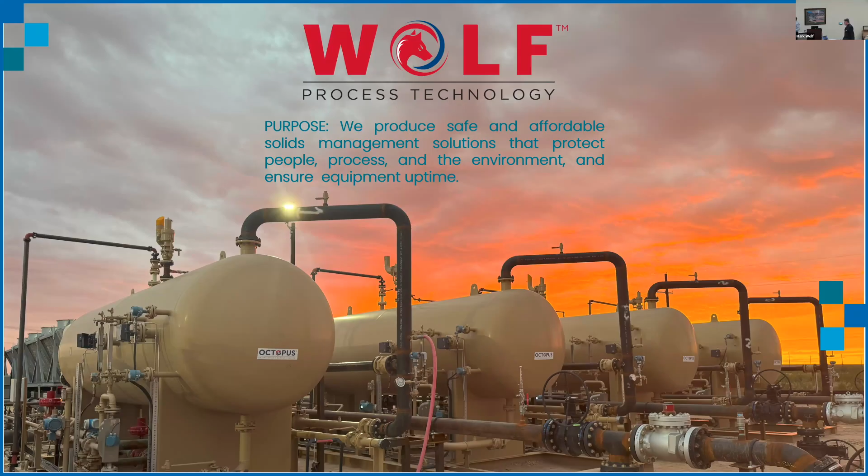Cleaning a tank or a production separator is still one of the most hazardous jobs in the oil and gas industry. I have a little statistic here. This is not oil and gas specific, it's across the US, but from 2011 to 2018, over 1,000 Americans, 1,030 is the exact number, lost their lives in confined space related industrial incidents. That's an average of about 130 people a year who died during that 8-year period, entering confined spaces and doing their normal daily job.

I went to look for a comparison, something a little more sensational. So I thought, okay, tornadoes and hurricanes, those are dangerous, they kill a lot of people. So I looked up that statistic. On average, in an average year in the US, 80 people lose their lives to tornadoes and hurricanes. So for that 8-year period, we killed more people sending them into tanks and separators intentionally than people getting hit by tornadoes and hurricanes across the United States. It's a significant number. It's an important number.

Now, we have a really good track record in the oil and gas industry. It's rare that we have a fatality. It's not so rare that we have near misses or incidents. And I'd like to share one incident, a story I heard recently from a good friend of mine who runs a tank cleaning business.

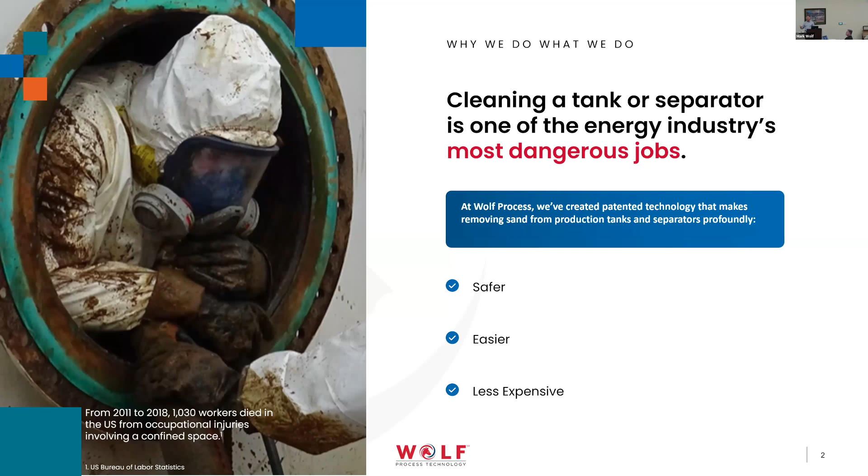Excuse me, I'm a little passionate about that piece of our story. So this is a good success story. This is an operator in West Texas.

We install our technology, and I'll get to the details of it in a minute. I'm sure lots of you want to know technically what is this thing. So we use thermal infrared imaging to detect the level of solids inside of tanks and separators. It works because the solids are an insulator. When they settle into the bottom of the tank, they insulate the shell from the warmth of the process fluids.

So now, if a vessel is offline and has equalized in temperature to the air, it doesn't work, of course. But when a vessel is live and you're flowing fluids through it, usually our well fluids are warmer than the outside environment. The warm fluids will light up the shell that's not covered up with solids. So we can very clearly see the solids, and you can see profiles.

It's really amazing. Simple tool. $400 for a camera that attaches to your iPhone now. That's how cheap it is to go out and get these. So if you know anybody that's dealing with it and they haven't already adopted IR technology for looking at levels of solids in tanks, they're behind the time.

That's simple stuff. But this is the image on the left. So we installed our Octopus in a 10x40 production separator. This is in the Permian Basin, in the Midland Basin area of the Permian Basin for one of the major operators.

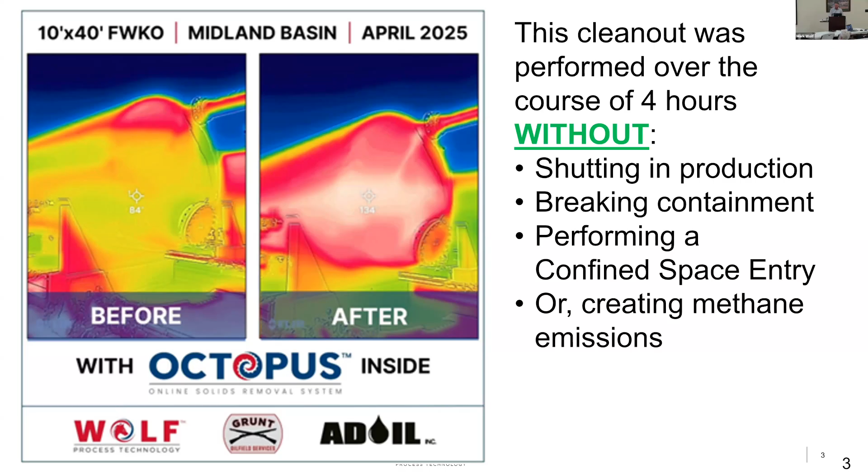So just a little background, and I promised I like to try and give some good content, not just a sales pitch. So I've got a few bits of technical information in here that I'll share with you.

So what we're looking at is a typical production system. They're all a little bit different, I recognize that, but a typical production system where your first step in separation is your primary separator. Sometimes you'll have a test separator in line, but for the most part, you're going into a primary separation vessel. It's usually a pressure vessel, although there are some exceptions in stripper wells. But this is the first place where sand wants to settle out.

Sand is heavy. And again, we're not talking about just sand. Sand is prevalent in the Permian Basin where they're fracking wells, but in other areas, it's other types of solids. So if I use the word sand or solids, I'm using them interchangeably. Please forgive me if I do. But the solids will settle out in the first spot where the momentum slows down, and that's usually the production separator.

It will build up if unchecked, and then it will start to carry over. You may see some decline in separation efficiency. You may see more emulsions, more bad oil coming out. These are all signs that solids are starting to accumulate in your production system.

The next step is it will follow carryover with the water, and generally that happens pretty quickly. So wherever your water goes next, in this diagram I've got it go through the gun barrel tank, which is pretty typical in West Texas. It may go to a free water knockout. If you're in high water production areas, free water knockout may be the first thing in your system. But again, this is just general in nature.

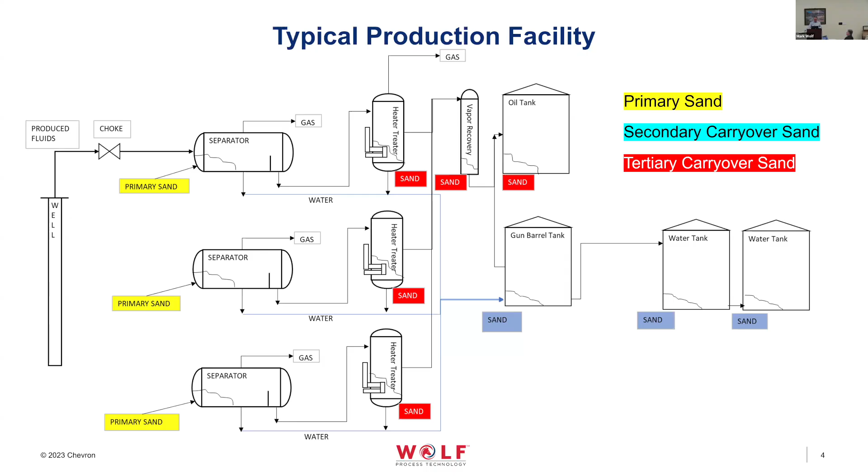Let me see, are there any questions so far? I'm kind of expanding a little bit - that's a tip, because I need a drink of water. So anyway, now would be a good time.

How much of the solids can you control with your technology before they enter the separator?

I hope to answer that question through the course of the next slides. And if I haven't answered it, please ask it again, because I have some good visuals that I think will help answer that. So just a little background on technologies.

I've got two diagrams. The diagram on the left is traditional sand jetting technology. It's been around for many, many decades - I've seen references back into the 70s. There was a good paper presented in the 80s about how to design a sand jetting system. In general, sand jets - I'm going to call them linear sand jets - introduce high pressure water through a small opening, a classic jet, using a pressure washer approach to sweep sand across the vessel floor to a central drain point. That's the theory behind it.

A lot of problems with traditional sand jet systems, which were installed in the North Sea from the original designs, and they failed - they didn't work for a number of reasons. One, the sand jets can very easily become plugged. They have to be fed with a water source, and oftentimes that water source will be coming from a tank that itself has solids accumulation in it, and it recirculates back through and plugs the sand jet.

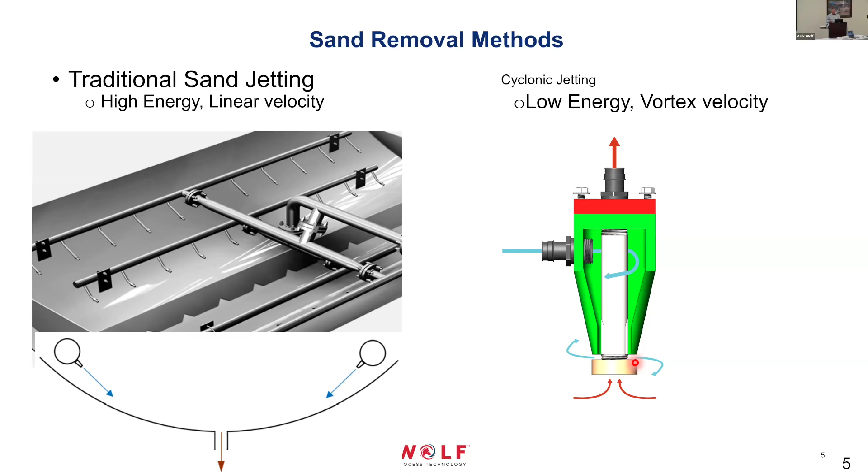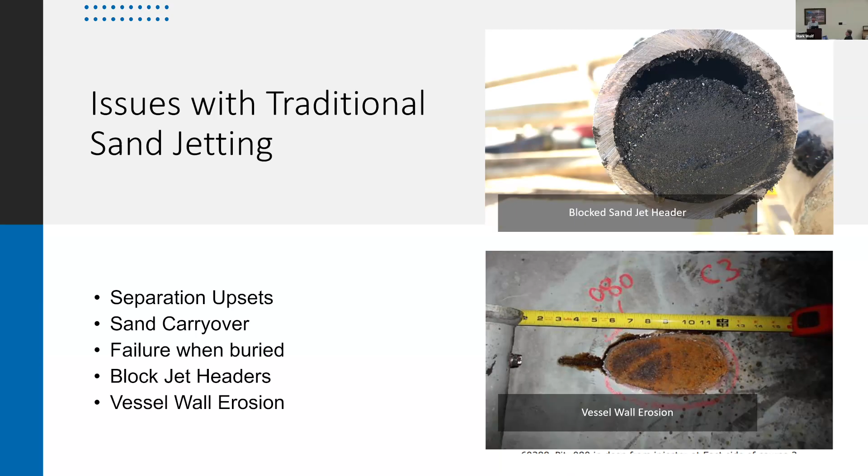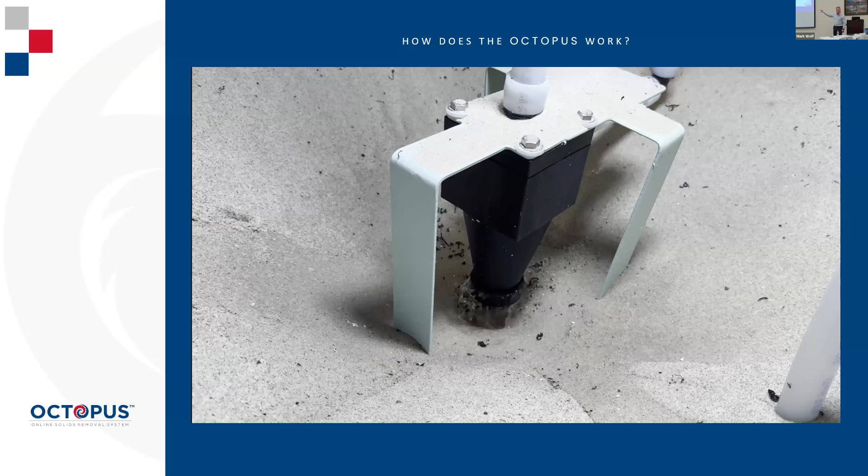What you're seeing is our cyclonic jet, or VFU. It's going to start where most of the sand has been removed, so we can see the swirling action, and then it's going to flip to showing full of sand. But let me just give this a start.

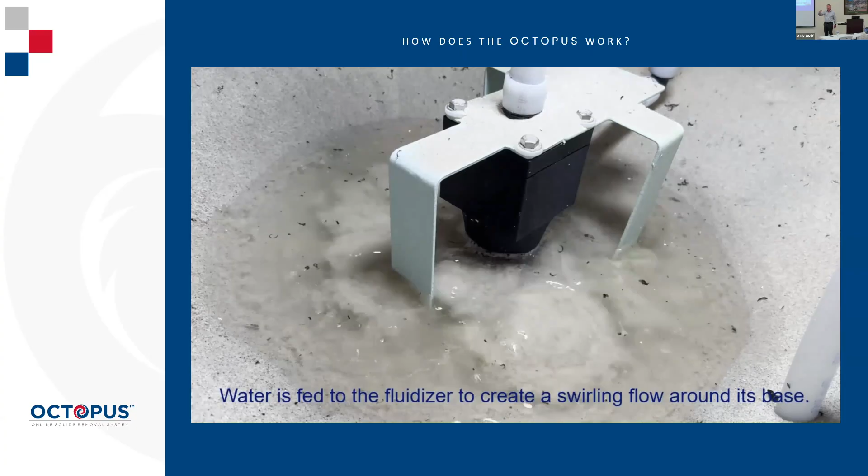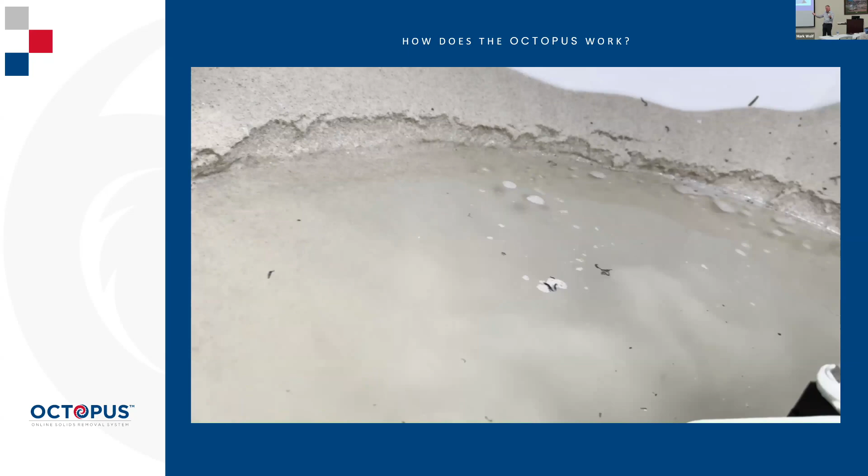So we're introducing the water. It's hitting the foot, and you'll see how it sets up a swirling motion that disrupts the sandbank. It's like undercutting in a mining operation where you're digging sand out from the base, and it sloughs into the area of influence where it can be pulled out by the vortex that's under the discharge tube.

You can see we're generally flowing at about 25% by volume with this sand. I won't get into the technical details of why, but it has a lot to do with particle size and characteristics of the sand itself.

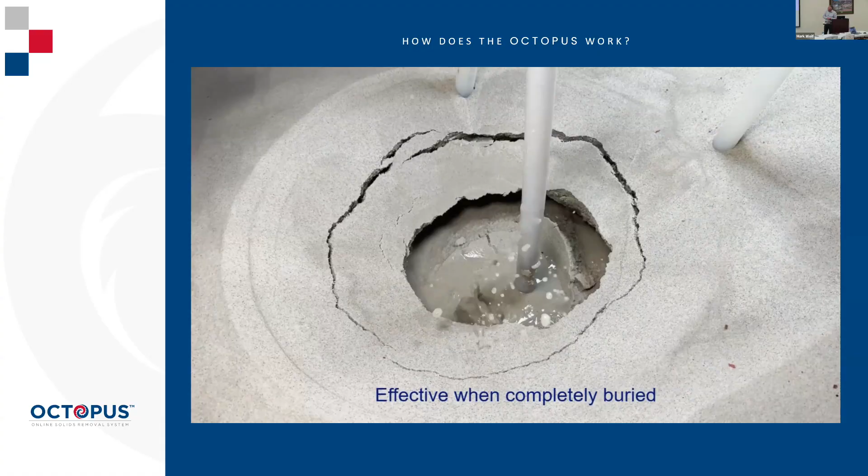This is my favorite scene in the video. That's about 3 feet deep right now. The picture I showed at the beginning was about 8 feet deep, and we were able to dig that out—very effective at removing solids when it's completely buried.

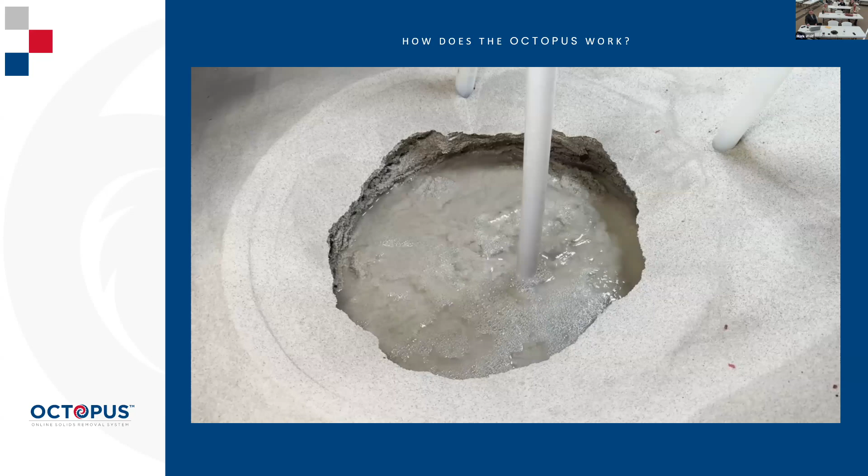If you think about a vortex, a tornado is a great example. The winds out away from the vortex are slow, and as you get closer they get faster and faster, because you've got the same mass of air trying to move in a much smaller space, so it has to move much faster. It gets acceleration—it's like swinging a rope with a coin on it. As you pull it in, it moves faster and faster. Just simple acceleration due to shortening the radius.

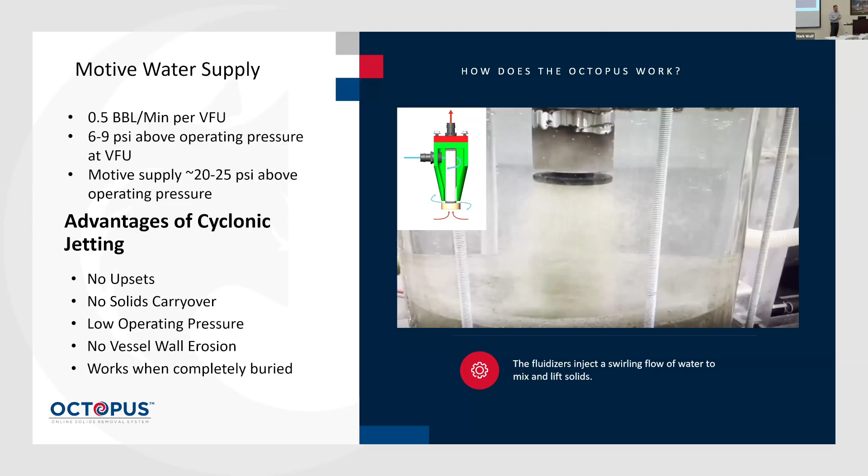And that's how we generate our velocity. That's why we're able to generate enough velocity to lift solids from the bottom without a lot of pressure. It's using the vortex. A little technical bit for those of you who are technically oriented. So, okay, that's the basis of the technology.

But our goal has been to reduce the cost. So I'll talk about how we did that.

So what you see in the upper left of this screen is the way we used to manifold these devices together. It's important to manifold them inside a tank or vessel because each of these jetting units has a 1-inch connection in and a 1-inch connection out, and each one will affect an area between 3 and 6 foot diameter. So we're covering a large area—we need to put a bunch of them together. We have to manifold them.

The way we did this, starting back in the 90s in the North Sea, was we engineered these mirror-imaged piping systems. If you look—I'll use the pointer again because I think it'll be helpful—if you look at this image up in the left, let me just explain why.

When we put multiples of these on a manifold, it's important to achieve what we call hydraulic balancing. The pressure loss from each device to the point of discharge of all the devices needs to be the same. If they're not the same, you'll have differences in pressure loss, meaning one device will pull more and the other will pull less. So we have to hydraulically balance them—that's why these complicated piping manifolds came into play.

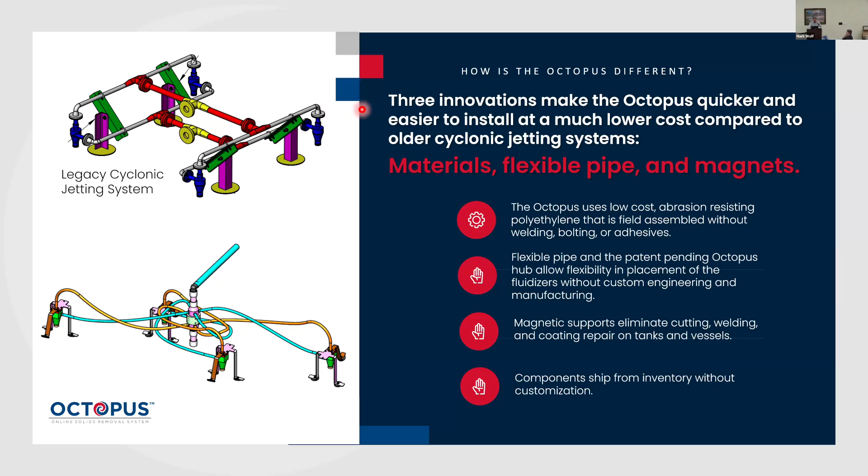This is an important part. Did I get that concept across well? Do y'all understand the advantages of the hub and the flexible pipe? Does that make sense? Question from the audience, Shane? They're behaving quite well. Okay.

Okay, so this video is already running. Before I get a chance to introduce it, I'll rerun it.

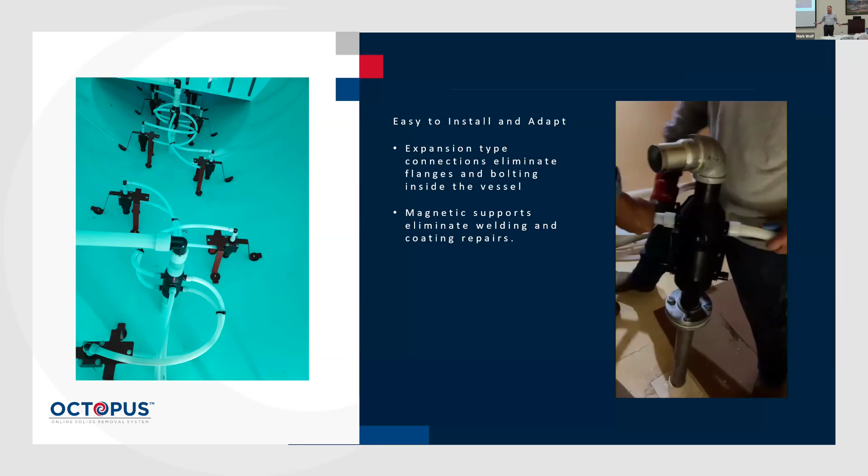So we looked at commercial materials and found PEX. You may have heard of PEX—we're using it everywhere in houses. In Houston a few years ago, there was a hard freeze. For Houston to have a freeze where the temperature stays below freezing for more than a day is rare, but it stayed below freezing for 2 weeks. In Houston, they build all the houses with piping in the attic.

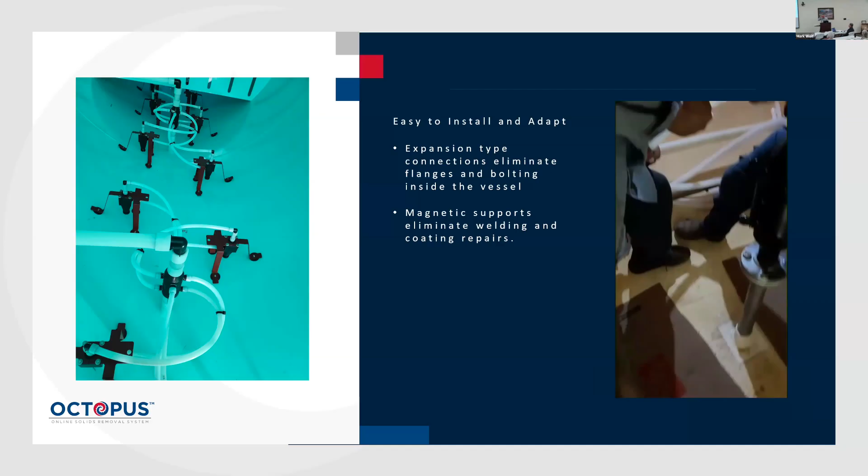There we go, run that. So you can see a joint being made where he's using the tool to expand out the joint and slip it over the barb. So that's how quickly the joint is made, and there's no metal.

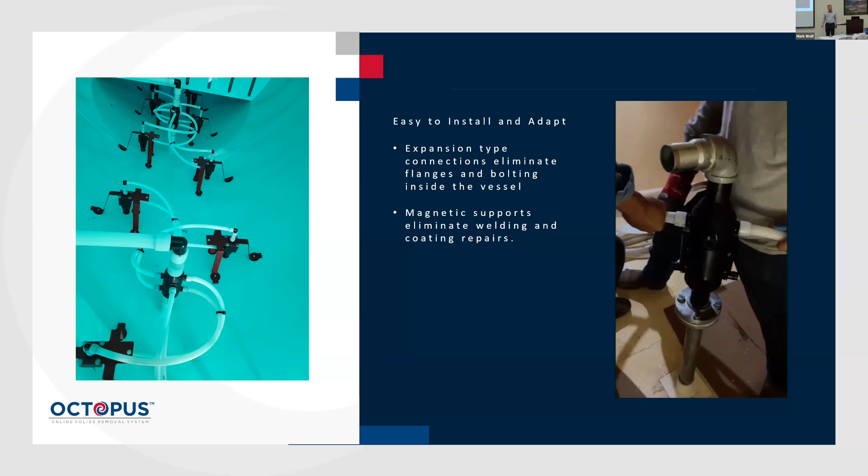We used to put these things together with flange joints inside of vessels. With a flange joint, you've got to use stainless steel bolting, you can't use carbon steel bolting. You put stainless steel against carbon, you set up the potential for dissimilar metals corrosion. It takes longer, all sorts of problems.

So we've taken care of that problem. When you're working inside of a confined space, we still have to go inside of these vessels to install them. We make sure they're cleaned out to what's called a level 2 environment, meaning it has an atmosphere that's safe, so we don't have to go in under air, and we've removed the hydrocarbon. Still, working inside of a confined space is difficult.

The floor is shaped like this, it's not flat, it's easy to slip. So we want to make it as easy and as quick as we can to do the installation. That's one of the innovations we brought to this technology, making installation quicker and easier. And this joint has done it for us.

The image on the left shows a fully installed system. You can see our main piping coming in from the vessel wall and exiting the floor, with our VFUs spaced out. This talks about another innovation we introduced.

We used to have to support all of the stuff inside of the vessel, and generally we would weld on what we call a clip, a little metal piece you can bolt something to. In a retrofit situation, to install a clip, you've got to grind away the coating, go in and make the weld. And if this is a code vessel, now you've got to bring out an AI inspector to re-inspect, re-hydro test. It's a long, arduous process that makes it prohibitive to do retrofits if you've got to weld in supports.

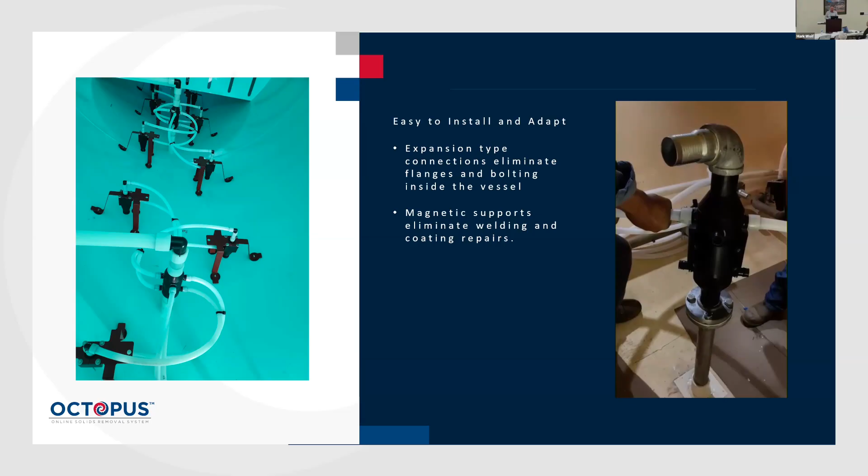Mark, yes, I don't have a sense of scale. How big are the VFUs, generally speaking?

I wish I had one here for a sense of scale. The VFU with the magnet, the VFU itself is about this big. That whole piece standing is about this tall and maybe this big at the base. This is inside of a 10-foot diameter vessel that you're looking at.

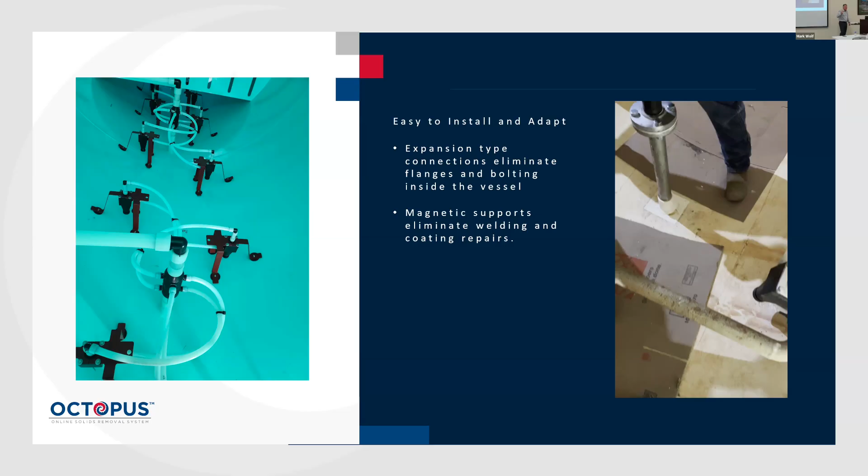Okay, just a little bit on materials. We do have some material options. The base material that we have in inventory is high density polyethylene, HDPE, and of course the PEX. The HDPE is rated to 180 degrees Fahrenheit, which fits most applications that we need.

We're also doing some high temperature work up in Canada in the SAGD area, a great EOR method that the Canadians brought to the world. They have much higher temperatures, so we do everything in stainless steel there. Same style of hub, but we're using convoluted flexible stainless steel in lieu of the PEX. So no PEX in the high temperature stuff.

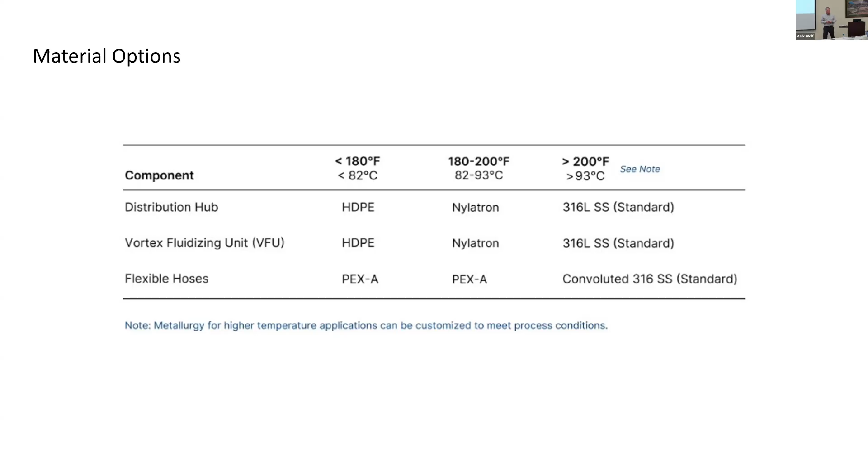There's room for an intermediate material in there, which we're calling Nylatron, but we're very, very close. We will eventually be able to replace the HDPE with the Nylatron and just have one material for the base. But at the moment everything is still HDPE, since it's more readily available and a little lower cost.

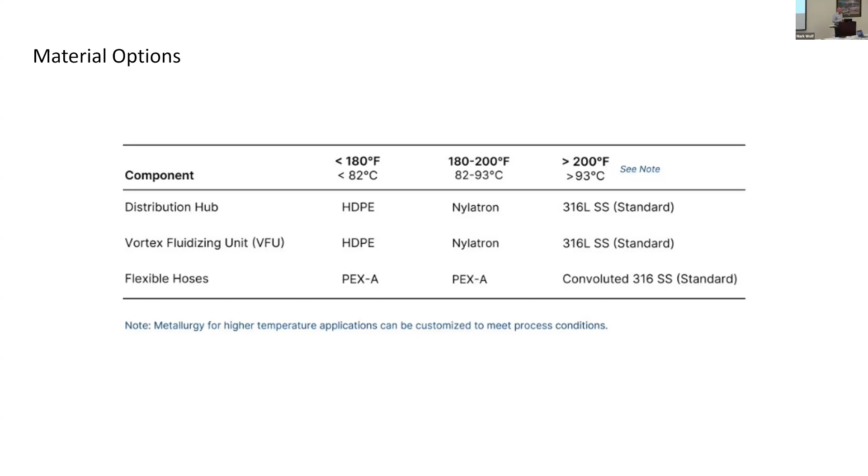We're at the point where we're machining our components. We haven't yet gone to molded components, so it just makes sense for the market that we're in now. But there's still room to reduce costs further, and we're working on that. Any questions before I talk about applications? I think I've covered the technology as well as I could.

Again, that's my trick, so I can get a drink of water.

So, are you using this application? I mean, it's a pretty neat concept. So is it just for onshore, or are you also using it offshore? I mean, you mentioned North Sea and Canada. So what percentage of your products are being used by the high temperature application?

I have a couple of slides that I'll talk about there. We've innovated outside of the vessel, but in general, if you look at the capital cost of what goes inside the vessel versus the CapEx for a typical offshore project where you have to automate all the piping, there are sequences - water goes here, then slowly comes out - and there are valve sequences to deal with. That's either a man sitting there who knows what he's doing, or a computer that's automated. But when we looked at those costs, the cost of the external piping with full automation was 85 to 90% of the total CapEx.

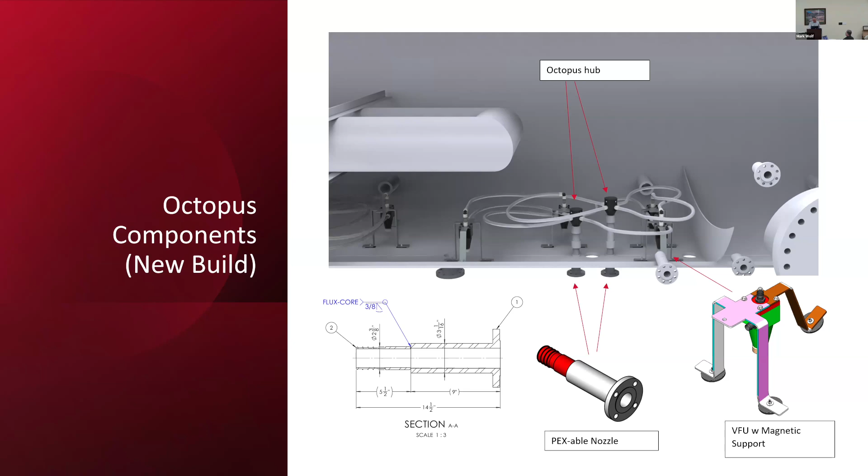When we do a retrofit, we're having to work with nozzles that are already there. We don't want to cut new nozzles onto the vessels - rarely does it make sense, though there are cases where it does. But usually there's a drain nozzle, some kind of spare vent nozzle, or an instrument nozzle that we can use.

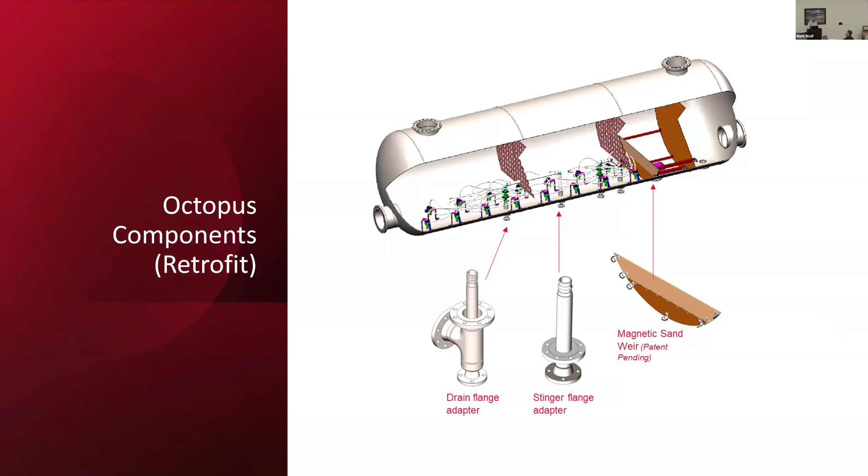So in some cases, we'll add a magnetically supported sand weir or sand dam into the vessel. In the image I showed a minute ago, you can see the sand weir right here in the vessel. This was something that was put in because the vessel was new.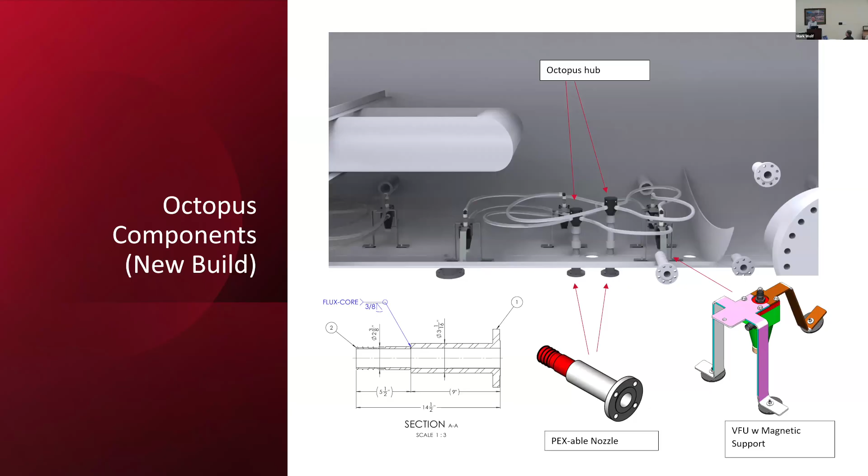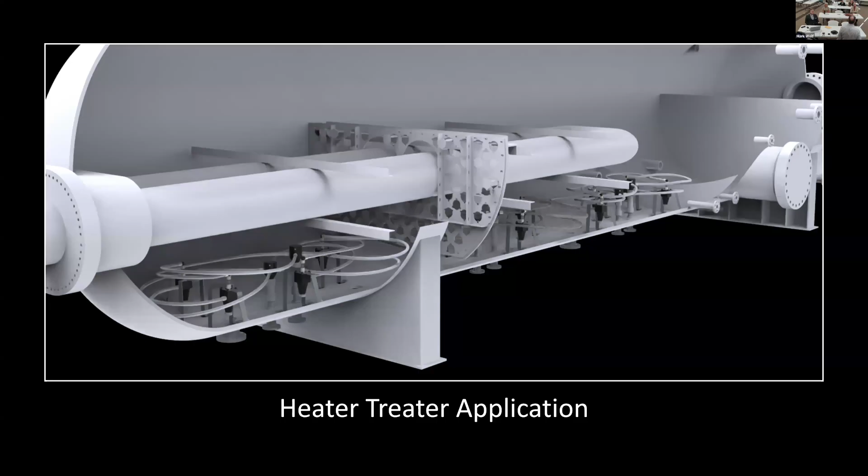This is a heater treater application. So I get the question: your PEX is rated to 180 degrees and you're putting it right up underneath a fire tube, where obviously the flame is at much higher temperatures. But the materials we're using don't see those temperatures. It's kind of like when you're sitting outdoors at a restaurant, it starts to get cold and they turn on the heaters. If you reach up and touch that heater, you burn yourself. It's hot right at the surface, but that heat dissipates.

So you're getting some radiant energy. When we're flooded underwater, the radiant energy dissipation is a lot higher, so the temperature of the fluid bath equalizes really within a few inches of the fire tube. So even though that's the case, what we look at is the planned operating temperature, or max operating temperature, of that heater treater vessel. For those of you who don't know this term heater treater, if you're not spending a lot of time in production, that big pipe is the fire tube I mentioned earlier.

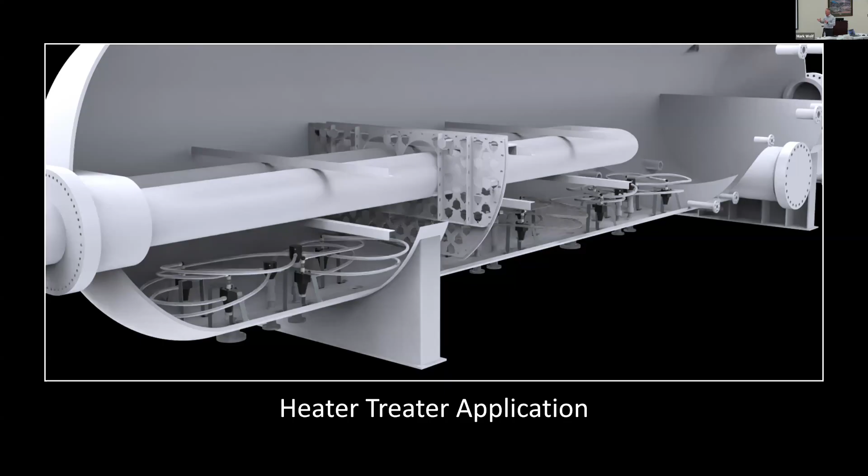We're talking about tube burnouts. You can imagine if solids settle on top of that tube, they can cause a hot spot. Now we're not preventing solids settling on top of this tube directly - this is a secondary case where the solids are being carried over in the oil and they'll get released. It's not carried over through the water.

Not really relevant - they'll tend to spread. So I mentioned the zone of influence of a VFU is between 3 feet and 6 or so feet. If we're in horizontal vessels, we always have a little bit of solids accumulation that remains between the fluidizers. It's not doing a clean sweep of the vessel, although we get pretty close. We call that the residual sand profile. When we're in a horizontal vessel, we like to have the spacing much closer to keep that residual sand lower.

If we're in a big tank, you're not so sensitive to a foot or two of solids in between the VFUs. What you're really doing is maintaining an operating volume in the tank, so we'll tend to spread them out a little bit further - generally around 6 or 7 feet around the wall, which is a more sensitive area because that's where you've got your inlets, your outlets, oftentimes wall mounted instruments, level instruments.

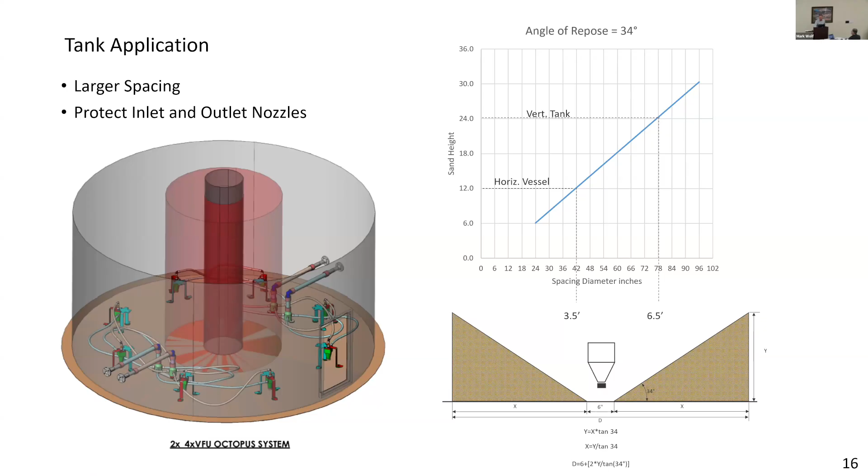I think I'm going to talk about the operating issue next. This is a little bit of educational information if anyone is interested. I mentioned this earlier, I see the same mistake made over and over again by trained engineers designing facilities just because they're not as familiar with designing piping to carry solids and slurries. So I just have two slides and two important items that I want to touch on.

As we start to slow down, we move into more of a heterogeneous flow where the solids are still fully suspended, but there's a concentration gradient—more solids towards the bottom of the pipe than at the top. As we lower the energy further and slow down the flow rate, the solids will now drop into what's called a sliding bed or moving bed, where a bed of solids slides across the pipe. This is the most erosive condition.

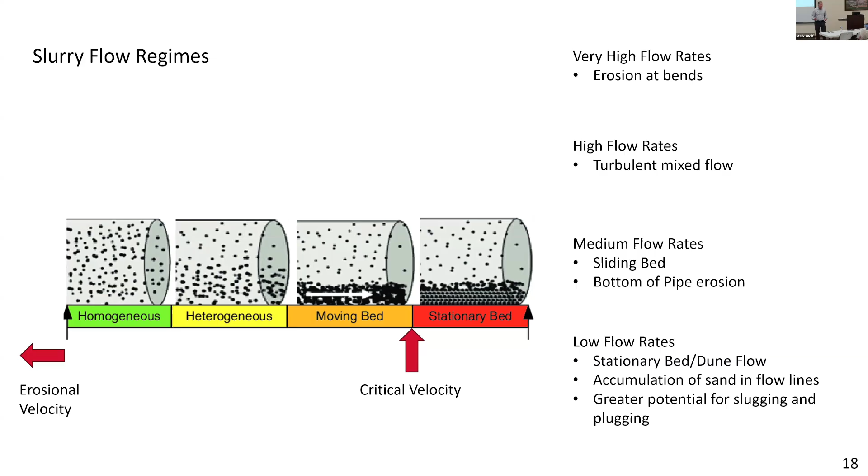I'm going to bring this home with a certain point. I talk with engineers and especially operators—they say, we're piping for sand, you've got to make the pipe bigger. No, we don't. If you put in a small diameter pipe, you're going to plug the pipe. If you put in a large diameter pipe, you're also going to plug the pipe. The large diameter pipe will be easier to clean if you plug it, but it's more prone to blockage. This is why—I like to give a little educational content rather than just all sales pitch. I hope you appreciate it.

I see this all the time when people design manifolds for sand jetting systems. They'll come out of the vessel with a 3-inch pipe. Typical manifold design—if you have a bunch of pipes coming into another one, commingling—you go up the line size, that's what they do. They'll go up to 4-inch, then somewhere else they go up to 6-inch. I've seen this time and time again in the SAGD operations in Canada. They've made the same mistake for at least a decade, and we're having to either repipe or come up with strategies to add flow to keep the velocities up.

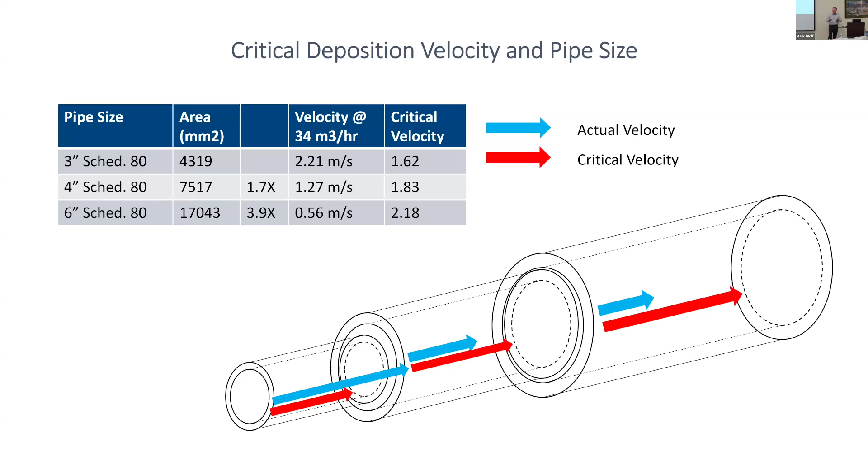But this is very important in piping design for slurries: bigger is not always better. It's all about the velocity—we want to stay above critical velocity. A little bit of educational content. If there are any questions, we can talk about that too, but I just wanted to share that.

Okay, operating methods—I'm going to take a quick drink. Any other questions before I move to the next section? Yeah, water treatment.

This is another project I consulted on in California. I did the process engineering work. You can see the line of automated valves, the pump. It was all expensive, and when we look at it, this still makes sense.

In traditional production, where you're in a sand type formation and you're going to see sand production for 20 years, it may make sense to make the CapEx investment outside the vessel and let it be automated versus manned. I don't know, people have to run their own economics.

When we looked at the unconventional market, where we're fracking with 20 million pounds of sand in a well and getting a few percent of that back, the sand production comes early on and then tapers off. So while they have a big problem for 3 or 4 years, it gets less and less over time, so it was much harder to justify those ROIs.

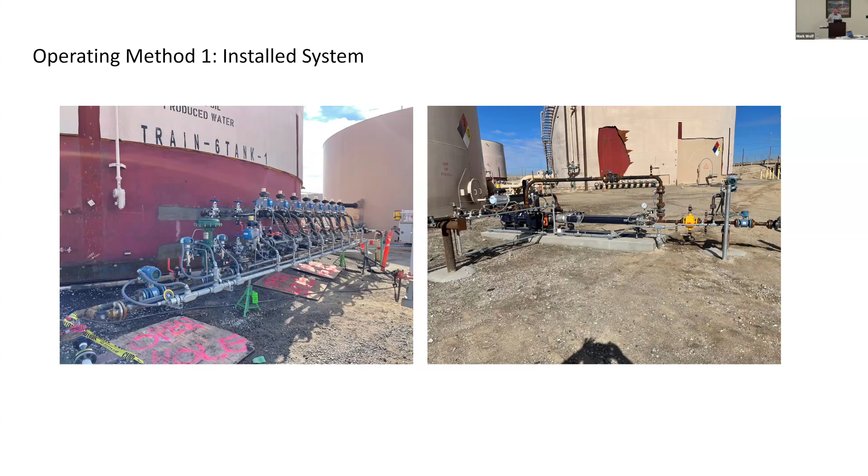So we've introduced into the Permian Basin an operating partner who can eliminate that CapEx. We pull up with a vacuum truck and a water truck, hook up manually with hoses, and it's a manned operation. We bring the CapEx way down. The OpEx is a little bit higher for a short period of time, but the economic gain is tremendous for this type of operator.

So we're doing this in the Permian. I don't know if it makes sense in other areas, but even if you do have a long horizon for sand production, it greatly reduces the cost to try.

If you're dealing with cleaning out vessels, it's dangerous, we're putting people in harm's way. This is a way that operators in these situations can say, we want to try something new without breaking the bank on a project that we don't have any experience with.

So we can operate this manually, we can do it, or we can teach you how to do it, either or, it doesn't really matter. But the whole point is to try something new to eliminate those confined space entry clean outs.

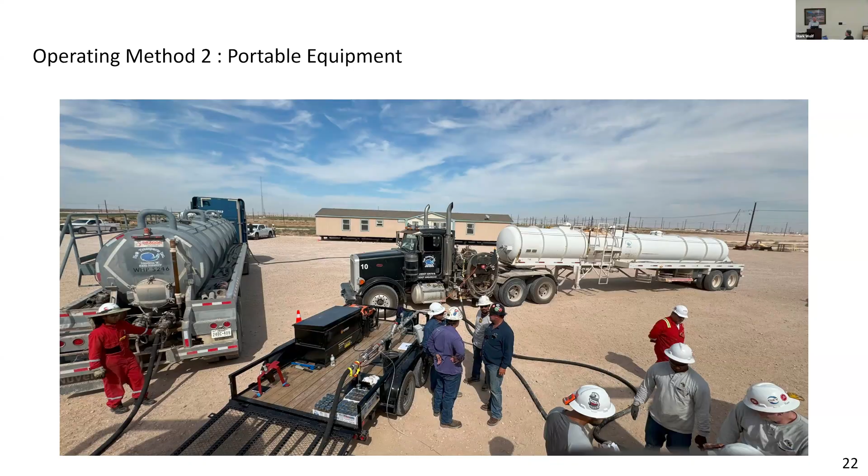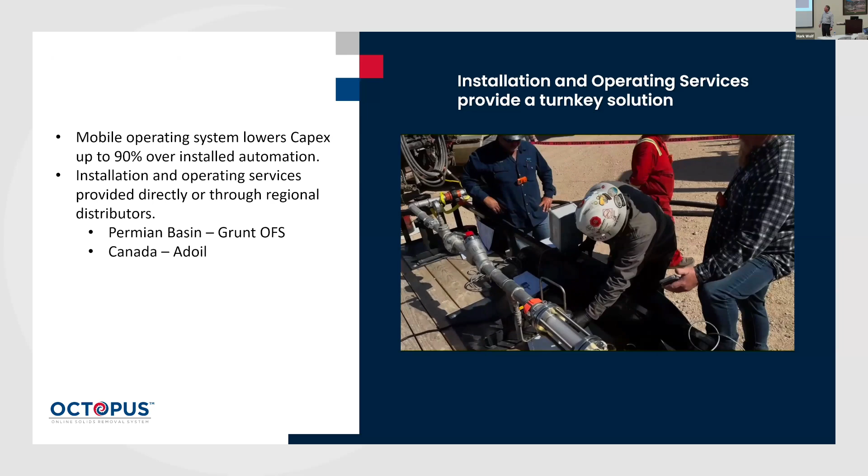This is just a quick video showing our crew operating. This is actually the very first one we did, so I was on site and did the videoing myself. It's just a simple little manifold. We're taking samples, and we have sight glass to see once we've cleared out the vessel, it'll start to run clean.

We can clean out a typical vessel in an hour. The example I showed you was 4 hours because he gave us a vessel that was 9 feet full of sand.

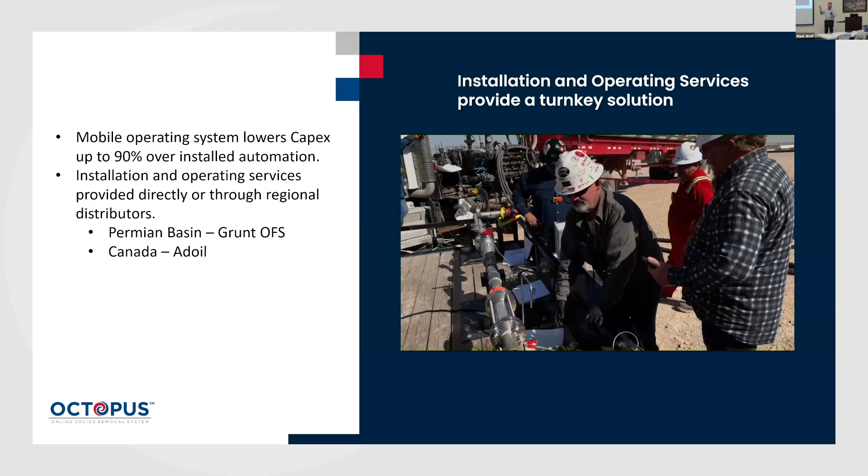So that's that piece. I've been droning on for a long time, that's the end of my slide deck. I'd love it if we got any other questions or ideas or things you'd like to talk about.

So what's the lifespan of the octopus product? It's great, actually, honestly it's really good. What's the lifespan of that product?

The materials are not subject to corrosion, and we believe they're not subject to erosion. We've been operating, the system has been in operation the longest since we put it in service in August of 23, so about 2 years. I don't have any data past that, but I believe it's going to last for the life of the vessel. In most cases, it's certainly going to last long enough to achieve payback and then some. I'd like to tell you you'll never have to replace it, but in the oil field things get broke, we know that, but so far we've had a pretty good record.

Any questions from the Zoom audience? Not yet, I did put out a chat message. We'll give them a moment, they have to type in, they have to type their thoughts. Okay, alright, feedback.

You guys have been quiet over on this side. What do you think? Are you working in these kind of environments? Dealing with, are you familiar with this issue of solids accumulation? Does it hit anybody? Does it hit home anywhere?